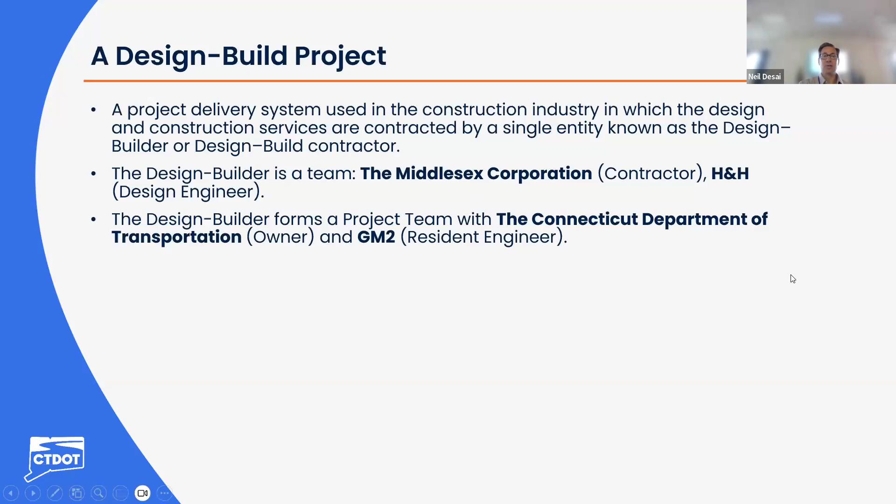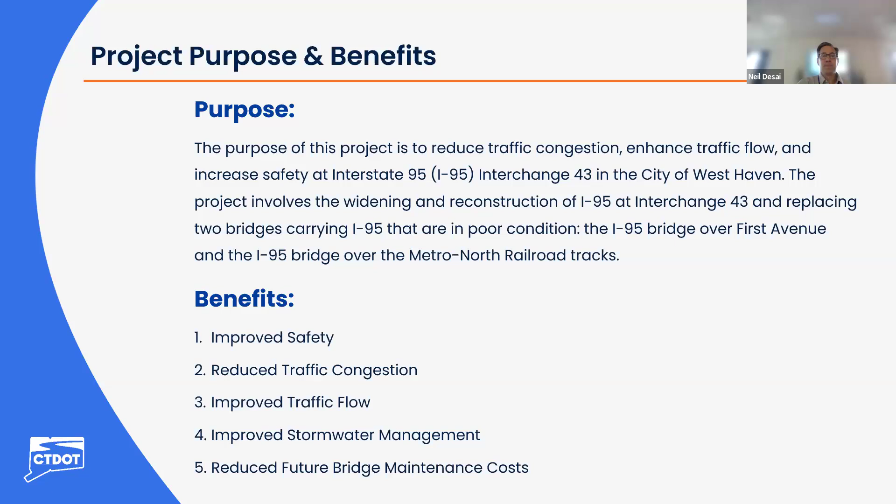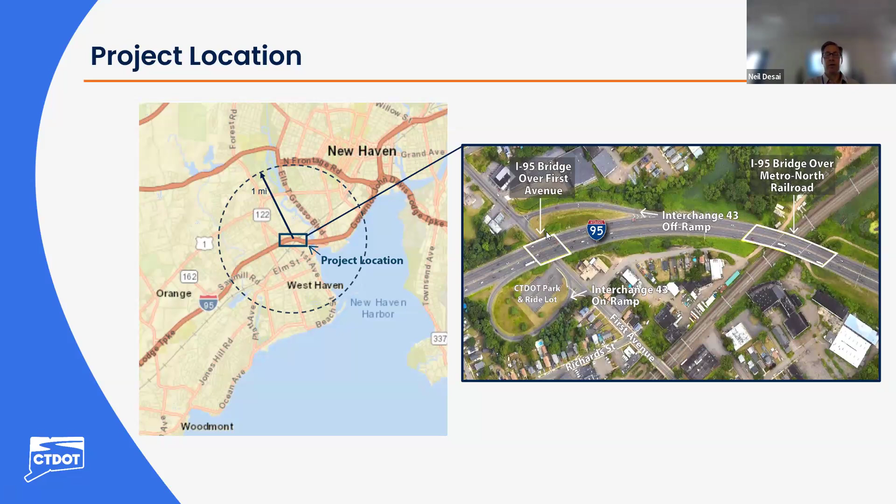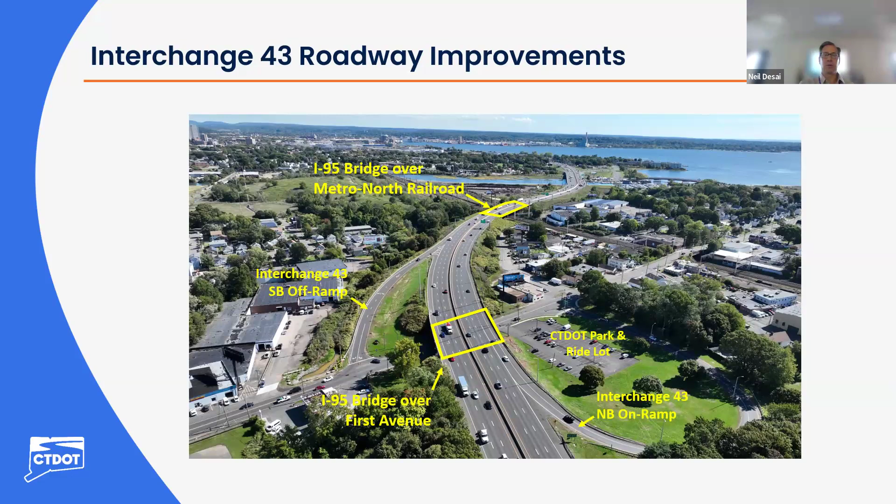Current conditions: the roadway right now doesn't meet standards for shoulder width, curve radii, and super elevation. These were designed in the 1960s originally, so standards have grown considerably since then. The roadway could stand to be improved through some widening to accommodate current and future traffic demands, as well as entering and exiting traffic.

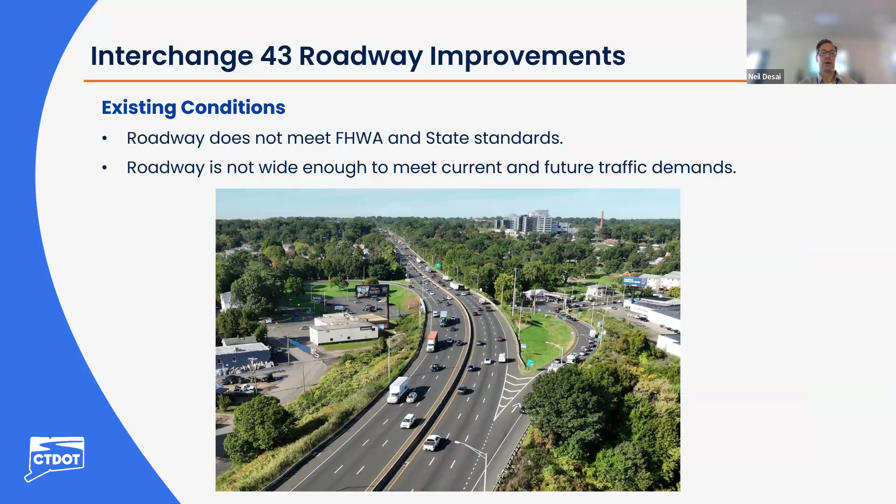Some of the interchange 43 improvements forecast: on I-95 northbound, the on-ramp has a relatively short entrance ramp, causing congestion as vehicles attempt to go upgrade and merge onto I-95 northbound. One improvement will lengthen that on-ramp, extending it up to the beginning of Bridge 162 over the Metro North Railroad, giving vehicles a much longer space to merge into traffic.

The 3 lanes currently crossing Bridge 162 and entering the project site will be maintained all the way through to the end of the project near Bridge 163 over the West River. The project begin point is essentially just south of the entrance ramp, where construction starts and moves through the site.

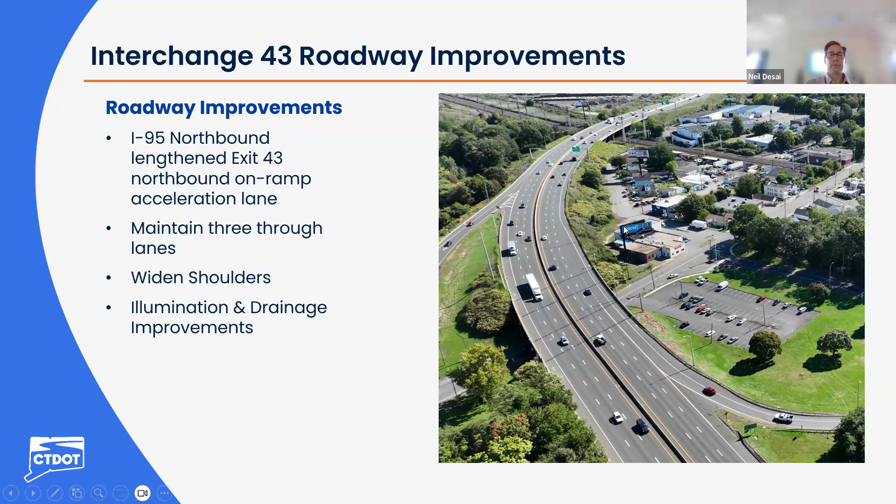We'll also maintain 3 through lanes similar to the northbound side. Much of that construction will occur adjacent to the southbound lanes, in the space between the existing bridge and the Metro North infrastructure near Bridge 162. Similar to the northbound side, we'll widen the shoulders—a 16-foot left and a 12-foot right shoulder—until it tapers down after Bridge 161 into the existing cross section.

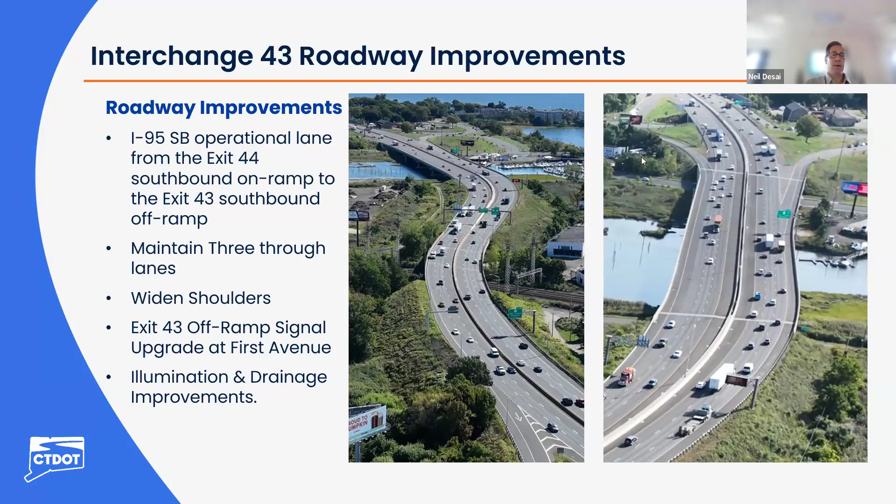There will be upgrades to the exit 43 off-ramp. Again, similar to the northbound side, illumination and drainage improvements will result as part of this project.

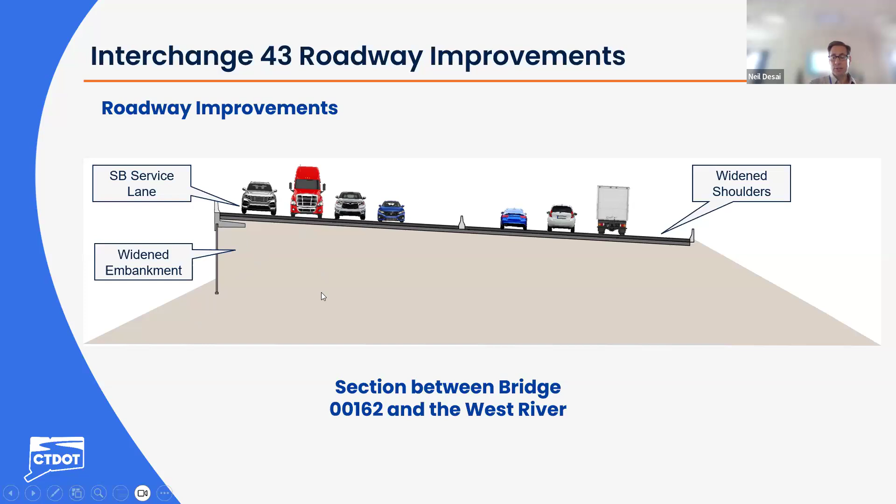As a result of this project, 2 bridges will be replaced; both are in poor condition. This is Bridge 161, carrying I-95 over First Avenue, pictured looking north on First Avenue towards northern West Haven—the park and ride from the orientation views is on the left side of the screen. This is currently a 3-span bridge, and the objective is to eliminate span 1 and span 3, making it a single span bridge over First Avenue.

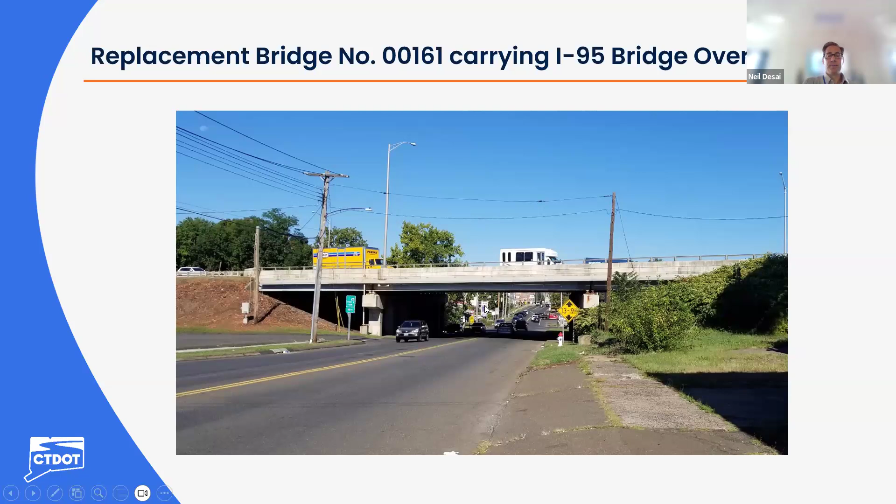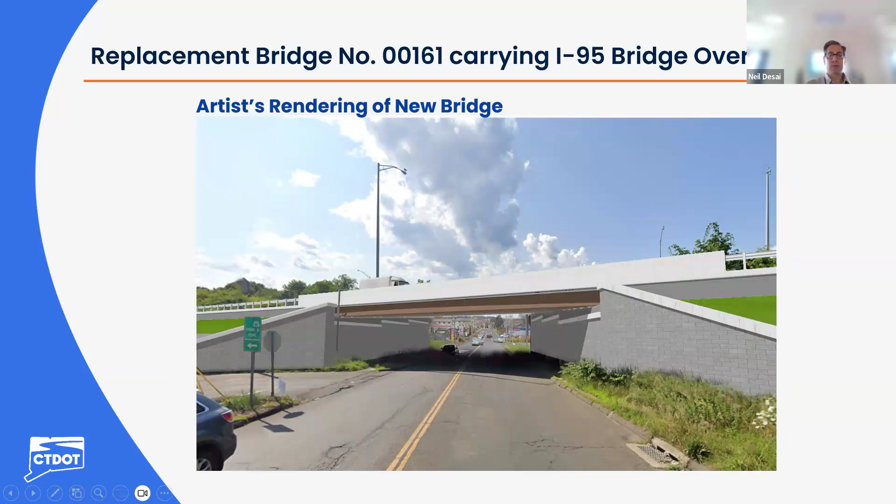An artist's rendering of what that will likely look like at the end of final design is shown here from a similar vantage point, with a wider roadway, new abutments, and elimination of the piers and 3-span structure. Another rendering, from the north looking south with the harbor in the background, shows I-95 over First Avenue and the widened structure.

Businesses located in the vicinity of the project, on either side of First Avenue, are being considered by the design team and are currently being evaluated. Thank you to the attendees who have made comments to the team.

On the exit 43 exit ramp, mast arm traffic signals will be provided to upgrade the traffic signal infrastructure for that new ramp as it comes down onto First Avenue.

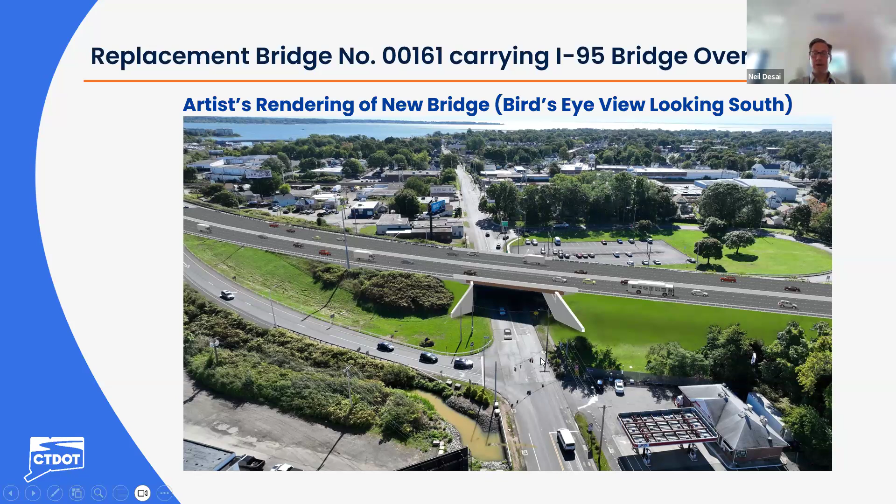For Bridge 161, here is an elevation view of what the bridge will look like. The existing bridge, shown in red, will be demolished, and the new bridge, shown in blue and gray, will be provided with additional width at First Avenue between the faces of the abutments compared to the existing bridge. The new bridge railing will be a concrete parapet meeting current safety standards, and spans 1 and 3 will be eliminated and filled with concrete face block abutments.

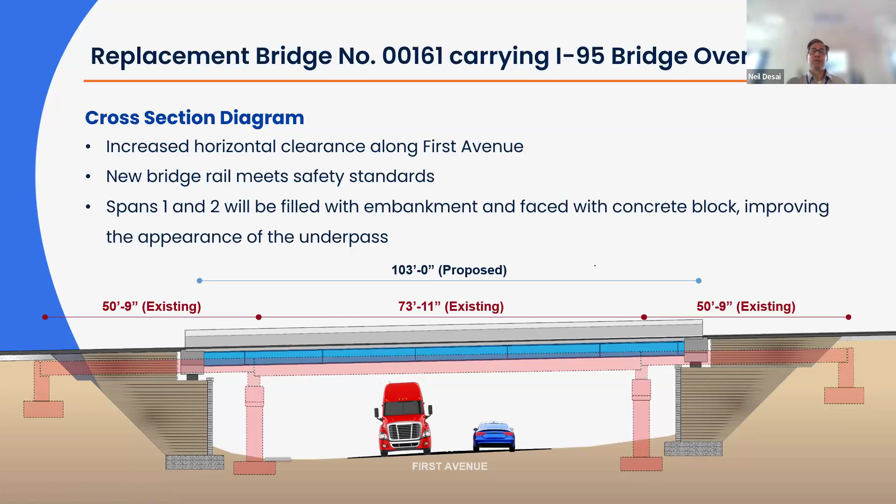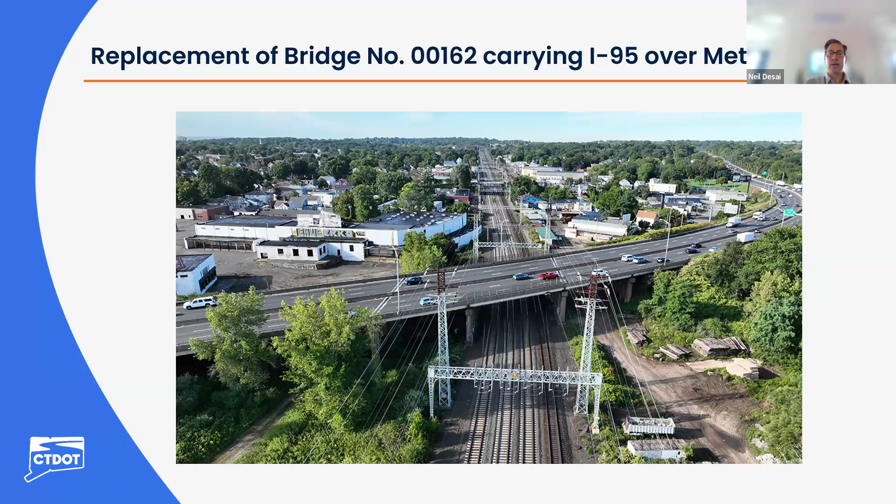Bridge 162 carrying I-95 over Metro North is replaced. That is a 6-span bridge at this point. It will be replaced using a single span bridge over the railroad and the elimination of existing spans using retained earth embankment and lightweight fill retained by retaining walls. An artist's rendering shows what that bridge will look like, including the widening, with a southbound additional service lane, a single span over the railroad, and the retaining walls. Lightweight aggregate will be used for the embankment to allow elimination of the spans and shortening of the overall infrastructure. That bridge will be constructed between the existing bridge initially and the Metro North infrastructure.

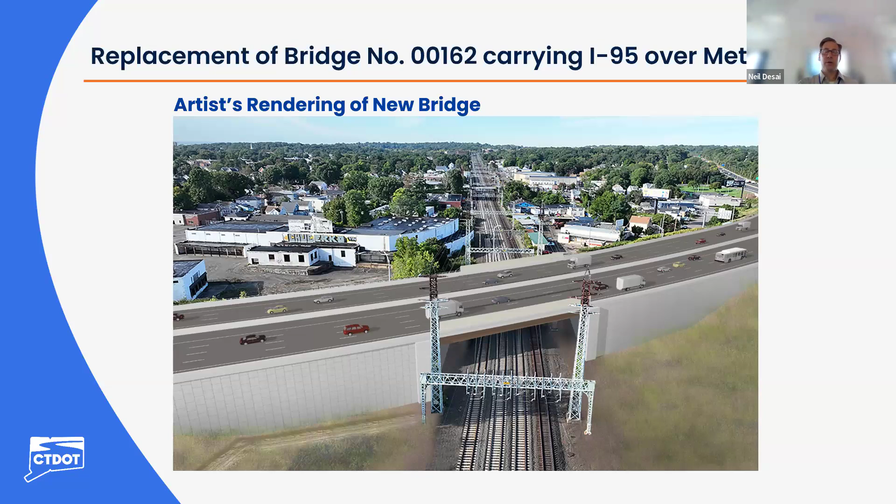Some upcoming design activities: the project as it's unfolding right now is a design build, meaning construction and design are concurrent. We're working on them at the same time to the greatest extent possible. Semi-final design has been completed by the design team and sent for the department's review. We are completing the remaining aspects of semi-final design, which is comment incorporation and resolution in compliance with the contract we have out for the project.

Another key aspect is the next steps for stormwater general permit registration and the development of a stormwater pollution control plan. You can see in this view that there are water courses and wetlands in the vicinity of the project, so those areas are important to protect with a stormwater general permit and stormwater registration. That stormwater requirement needs to be completed before any soil disturbing activities are performed by the contractor. That is a priority at this point.

The final design would then be completed, with release for construction following shortly after. There are two elements to release for construction in a design build. There are early release for construction packages, developed to allow the contractor to perform some activities before other elements of the design are fully completed. So we're working towards developing some packages to get construction of the project moving forward where possible. The other aspect would be the ultimate final design packages.

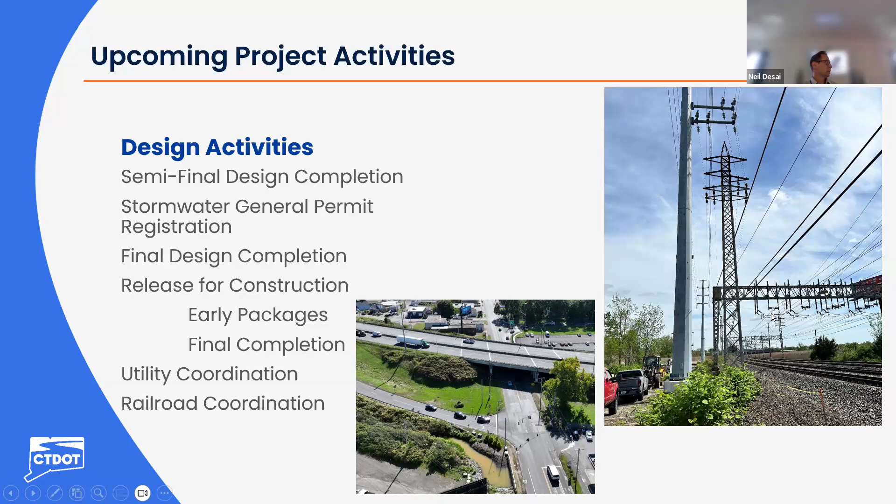Sure. Terry Stressbeck with Middlesex, the general contractor for the design build team. As Steve mentioned, some of our first activities on site coming up will start with our early release for construction plans. We're getting close to that point now for one of the first activities being in the staging area, located at the Park and Ride on the northbound Bridge 161. We're expecting to start there this late summer, this fall, with some material deliveries to the site that we can get a head start on.

Another early release is our test piles for Bridge 162. We're able to get a head start on that early this fall to advance on that bridge. Then first activities up on 95 will be roadway shoulder strengthening for future maintenance of traffic, to move traffic over for the first stages of the project. And we'll also get a head start on erosion and sediment control for the project with an early release plan.

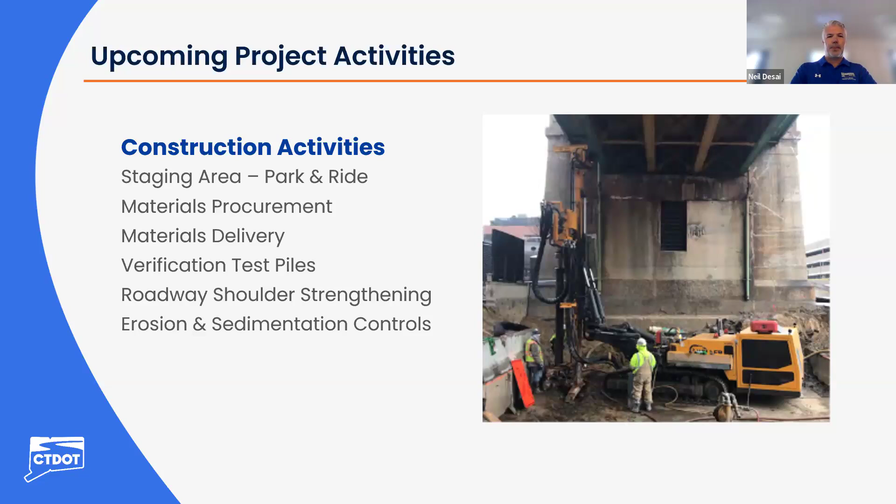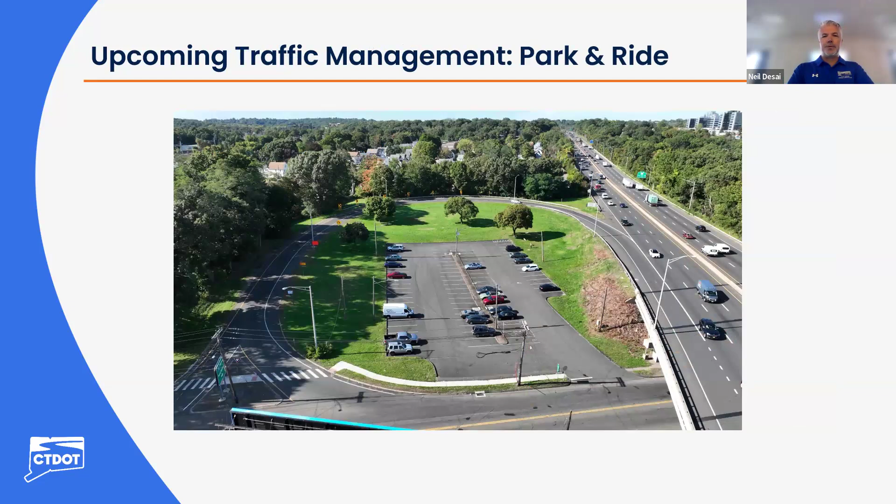The Park and Ride area is a staging area for the project that I had mentioned. This is an aerial view of the parking lot currently. What we will do is share that lot with existing commuters. The shaded area is what will be a staging area for Middlesex. We will maintain 34 spaces, including 2 ADA spaces, for commuters while we are working in the area. So that will allow for partial occupancy for the entire project duration, starting late this summer.

We have already coordinated with the shuttle bus services to relocate some that are using that commuter lot currently, and we are again expecting this to start late this summer, early this fall.

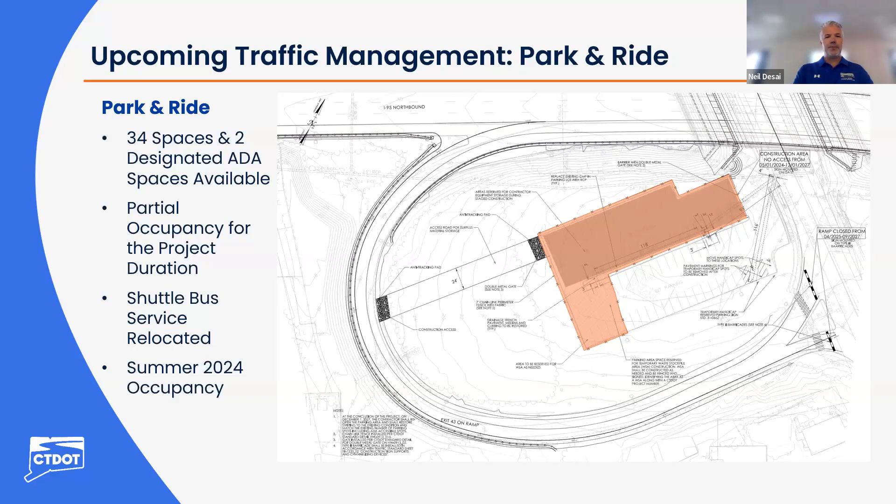So some of the shoulder paving that Terry mentioned - there is an element of the project's traffic management plan where, to construct Bridge 161 and 162, we need to shift the traffic in the northbound and southbound lanes. What that will entail is the northbound lanes will need to occupy the shoulder in the vicinity of the bridges, and those shoulders are currently paved with an inadequate layer of pavement to support the amount of traffic that will be required of them during the project.

Some initial paving will occur in the vicinity of Bridge 161 and up towards Bridge 162 and a little bit beyond that. So a plan view of that is essentially shoulder paving. There'll be no detour routes as part of that work. The work can be performed during off-peak work windows, and we expect that to be late summer 2024, early fall to get that paving work completed.

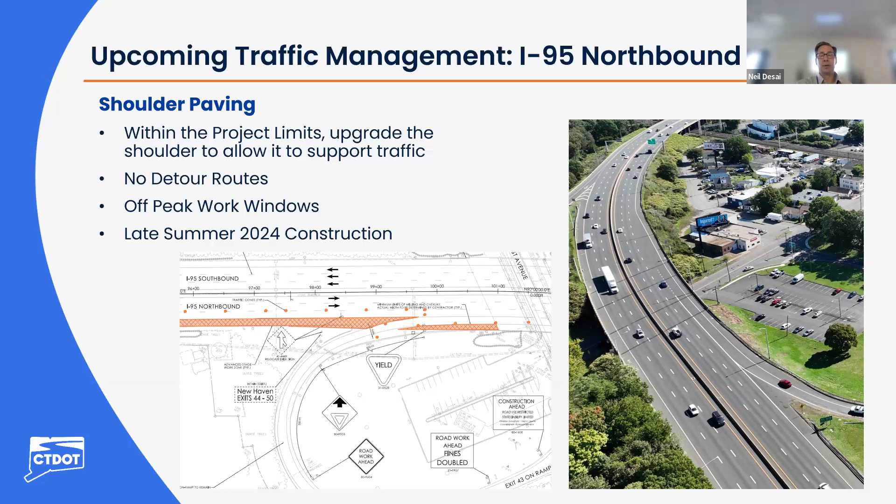So the staging sections that we discuss, this is Bridge 161 shown, will be as shown on the right side of the screen, looking at the abutment.

So upcoming construction staging, this is really advanced stage work. That paving will essentially be in a work zone adjacent to traffic with some lane closures to allow Middlesex some room to complete the work.

I-95 southbound will essentially be unaffected by this, so northbound traffic during off-peak will be reduced in the amount that the contract permits, at the hours overnight that we're allowed to do so.

So that shoulder improvement will be done during essentially what is an advanced stage. This advanced stage will continue, and once soil disturbing activities are permitted and the permit has been provided, essentially portions of the abutment will be constructed directly below the existing bridge up to the point where we're able to do it. That's shown in green in this view.

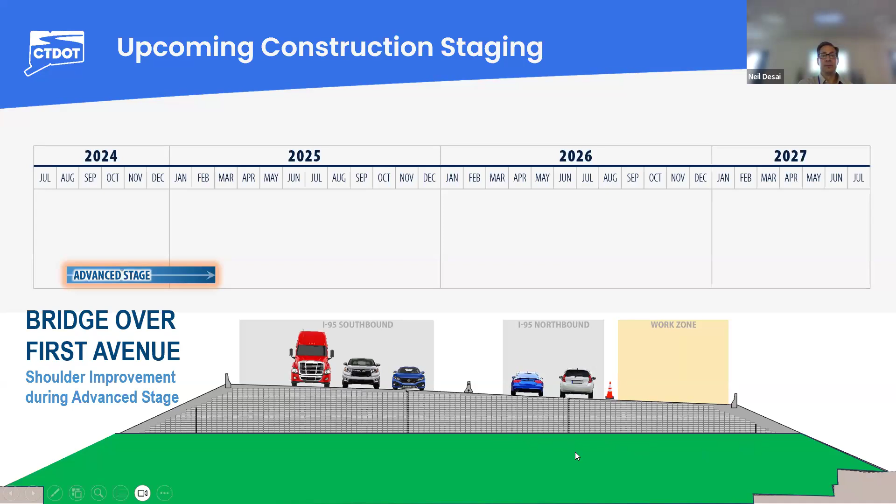Another future traffic management aspect to discuss is a detour route. Because that traffic needs to occupy the shoulder for the northbound lanes, the already short merging taper for the interchange 43 on-ramp to northbound will essentially have to be closed to maintain safe travel conditions during construction.

So detour route at that time will be activated. We expect that to occur in the spring of 2025.

On the right, the proposed detour routes are shown. There's a northern detour up Campbell Avenue to Boston Post Road and down Ella T. Grasso Boulevard, allowing traffic to enter I-95 northbound at interchange 44.

There's also a First Avenue South detour over the Kimberly Avenue Bridge, and then across to get to I-95 northbound, instead of using the interchange 43 ramp that will be closed.

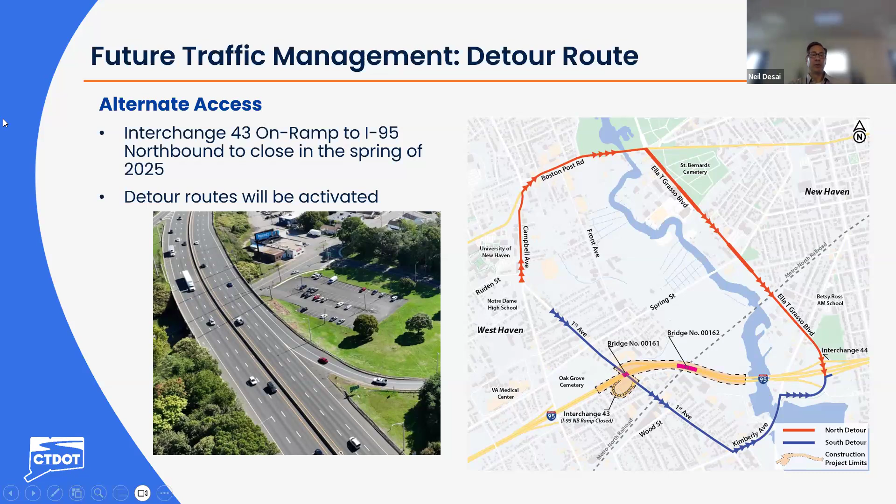On the I-95 main line, when the bridge over First Avenue is being constructed, the initial stages will occur adjacent to the southbound lanes. Partial demolition, approximately a third of Bridge 161 or the bridge over First Avenue, will be demolished. Traffic will be pushed over, as I noted.

Occupying the shoulder, so northbound traffic shown away from the viewer. Stage one would be the work adjacent to the southbound.

Once that is complete, southbound traffic will be shifted onto that new roadway and new bridge, and the middle portion would be done between the two bounds.

And then ultimately traffic from the northbound will be shifted to that bound, and then the remaining work would be completed at that time, followed by some additional stages to clean up striping and paving, etc., as we complete that work. All the while, the First Avenue on-ramp will be closed to allow for those tighter conditions in the shoulder.

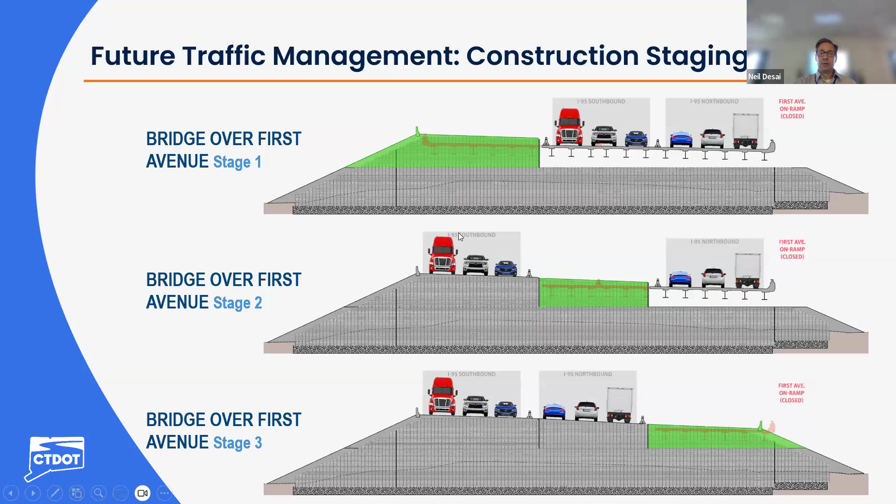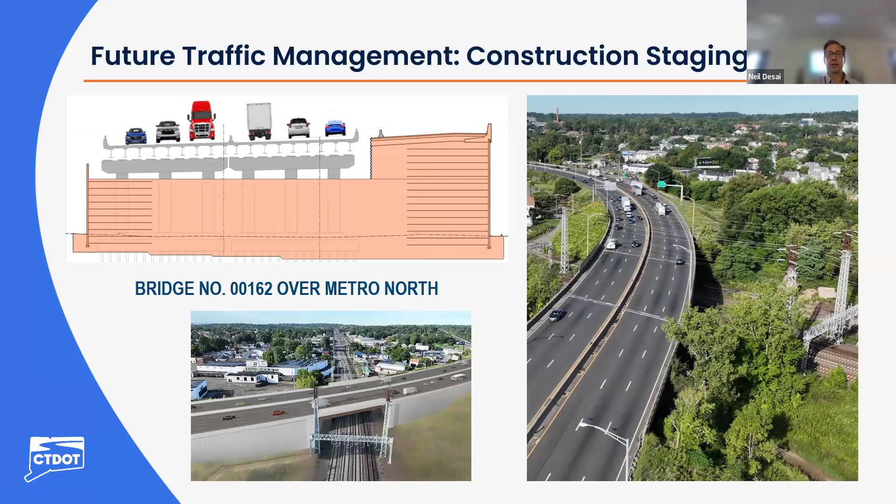Those abutments would need to be constructed in span 3 on the left and span 1 on the right, and this would occur in the stages we've identified over the roadway. Then traffic signal replacement in the vicinity of the existing traffic signals, using traffic signal mast arms instead of the span wire that's currently in place.

For traffic management, largely two traffic lanes would be provided during peak hours, allowing northbound and southbound traffic to pass through the site. The roadway would not be closed.

During off-peak periods, there may be times when alternating one-way traffic with a flagger or a police officer might be necessary to allow equipment in to do work near First Avenue. There may also be halt periods of approximately 10 minutes to allow movement of large pieces of the future bridge as girders are placed.

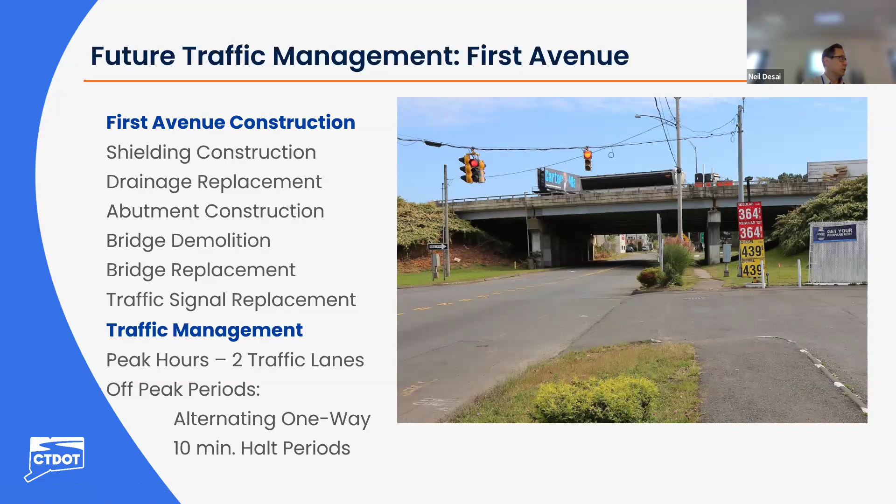So the public outreach plan, including social media, will be used to communicate any of these changes as we move forward. Neil, I'll turn it back over to you for the question submission form. Thank you.

Thank you, Steve and Carrie. I'd like to first bring attention to the different methods through which you can ask questions. On this slide, it shows you can email the DOT directly, or leave a comment by phone by leaving a voicemail message at the phone numbers provided. We'll be looking at questions that have come in from Zoom and answering those right now. And of course, there's a project website at I-95westhaven.com with a contact us page. I think right now I'd just like to open it up to in-person questions for Steve or Carrie.

Yes, sir. The question is about the ramp southbound—is it going to be closed? Specifically, is the exit 43 ramp southbound going to be closed? The answer is no. There may be periods of off-peak closures for paving or similar work, but there's no detour plan for the exit 43 off-ramp from southbound to be closed.